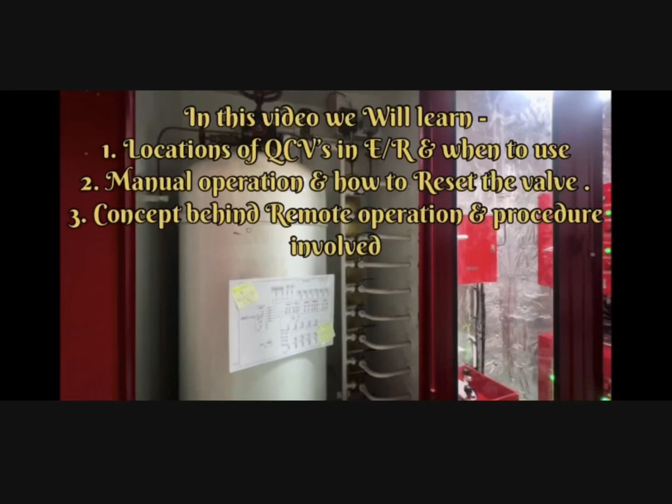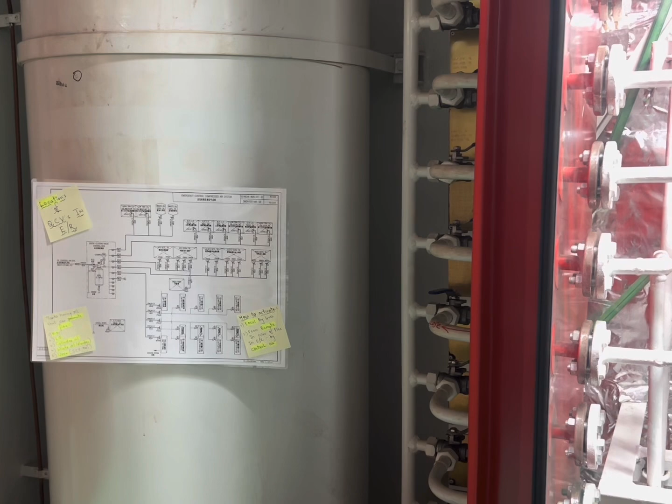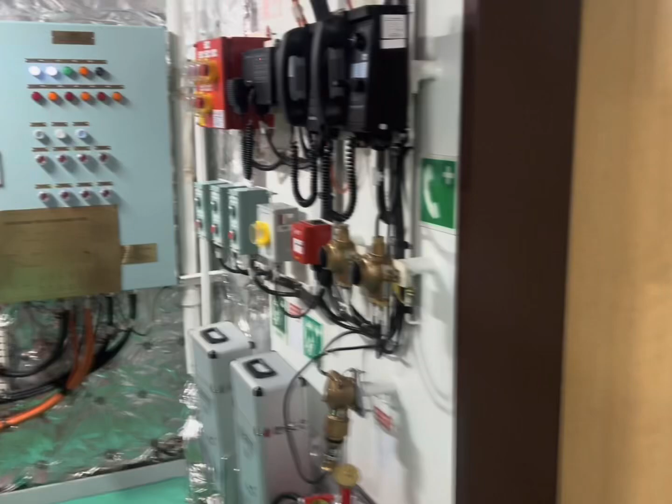So guys, in this video we will talk about what all are the locations of quick closing valve in the engine room. So presently I am in the fire control room of my ship. Along with this we have the manual release of CO2 system for the engine room and for the cargo hold. Also in the fire control room we have the local water mist panel. So in case of fire we can operate the water mist from here.

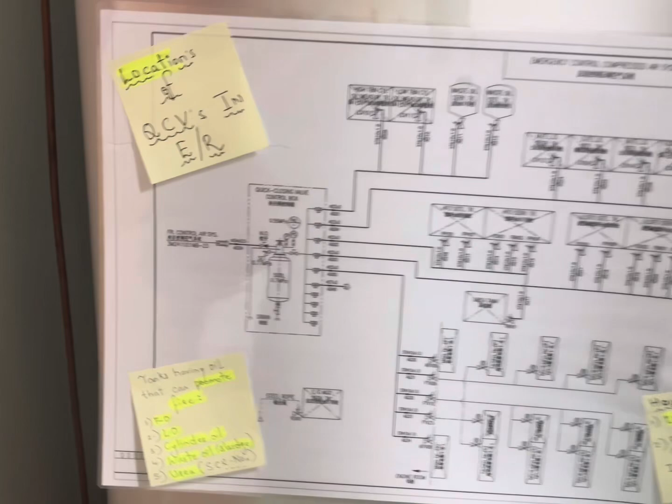Also we have the fire damper panel, and in the end we have the air bottle for operating the quick closing valve. So coming to the main topic, what all tanks are required to be fitted with the quick closing valve. The tanks having oil that can promote the fire are required to be fitted with quick closing valve.

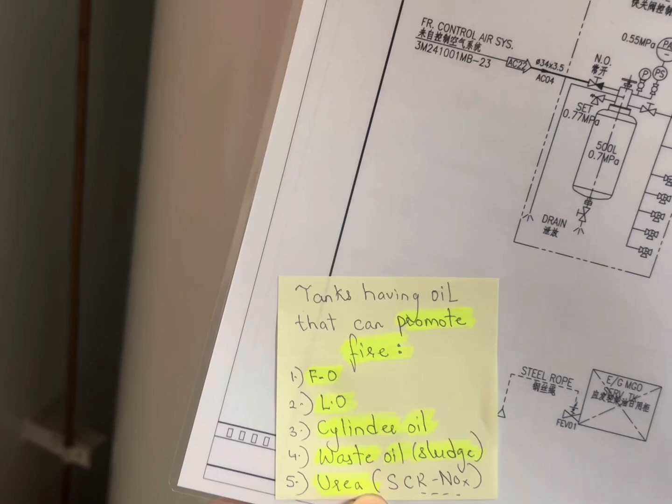That can be fuel oil tanks, lube oil tanks, cylinder oil tank, waste oil tank, and in our case we have the SCR system on board ship for controlling the NOx. So the urea collecting tank is also fitted with the quick closing valve. Here are a few of the examples.

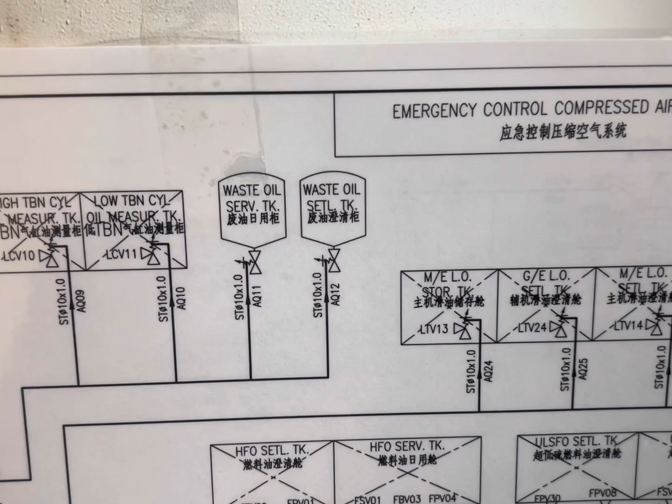The cylinder oil tank, high TBN, low TBN, we have waste oil tanks, service tank, settling tank, we have the lube oil storage tank for main engine, auxiliary engine and various others. Then we have the fuel oil tanks in the engine room, that is the heavy fuel oil settling tank, heavy fuel oil service tank, low sulfur service and settling tank, and MGO tank. And then finally we have the fuel oil storage tank, port side and starboard side.

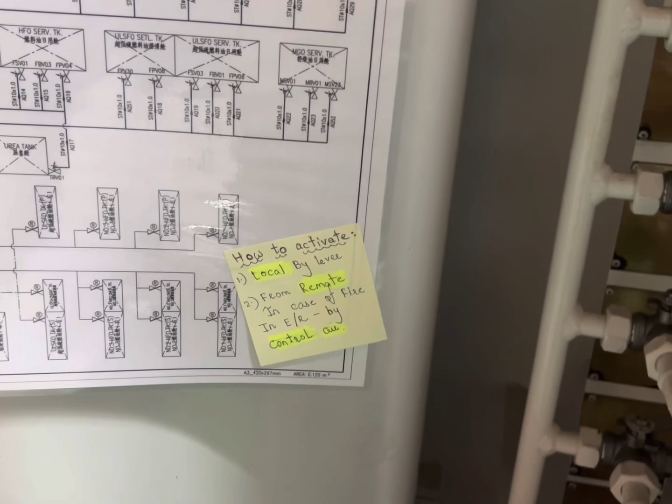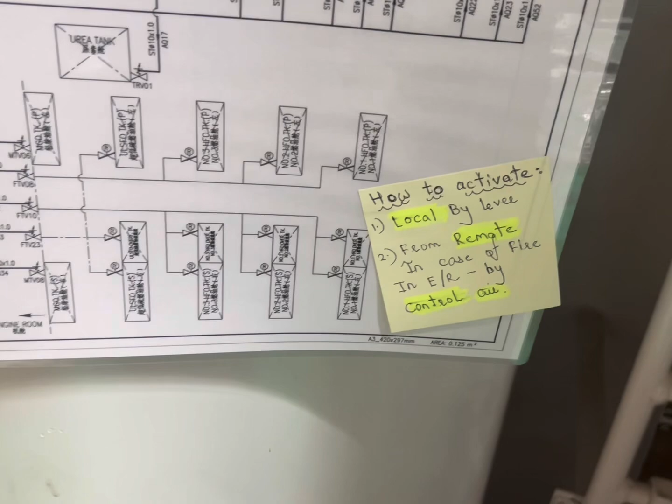Now the question is how to activate this quick closing valve. It can be activated by two methods. One is manually from the local position, and secondly remotely from the fire control station by means of control air. So here you can see this is the control air bottle. The pressure is around 7 bar.

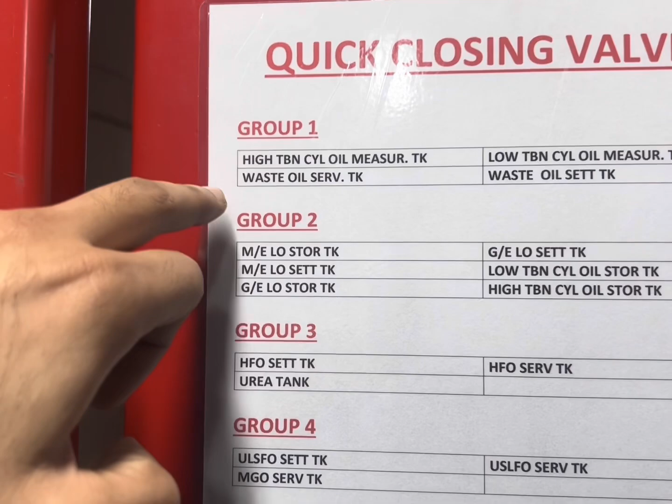From the main engine air bottle, after being reduced, the air is coming and it is being filled here, and then from here it is going to the different sections, or we can say different groups. So here you can see the different groups. Group 1 will be containing the quick closing valves in these 4 locations. Group 2 will be containing the valves in this location. Group 3 like this. Group 4, group 5.

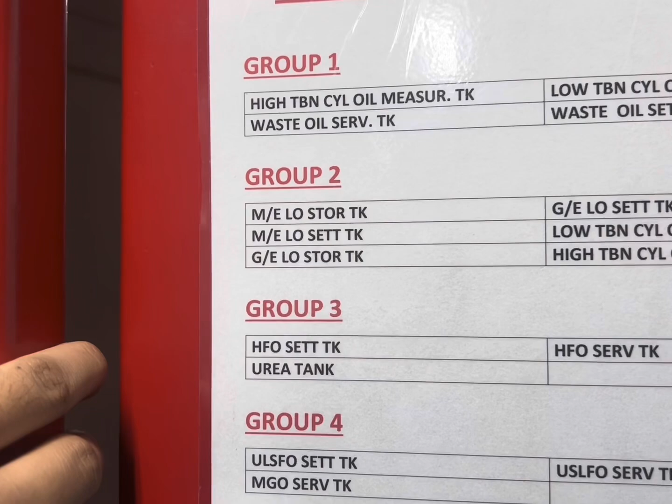So in case of fire in the engine room, let's say in number 3, if you want to close the quick closing valves which are located in group 3, you will bring the valve to the vertical position here. The air from the air bottle will pass, and all those valves located in group 3, heavy fuel oil settling tank, urea tank and HFO service tank, will be shut, and no more fuel from these tanks will be passing to the system.

So simply by operating this valve by 90 degrees, you can close the quick closing valves in that particular group, and that's it. So now I will go in the engine room and I will show a few examples of the manual activation of the quick closing valve.

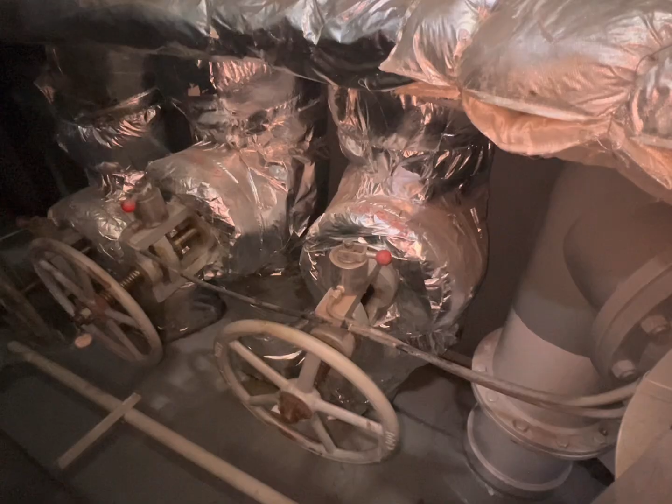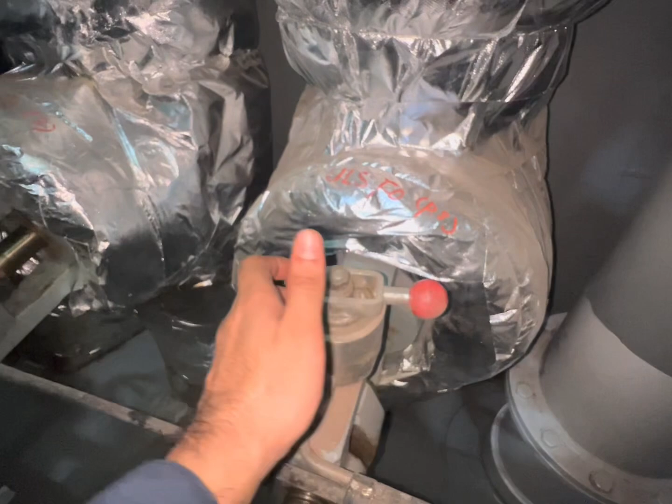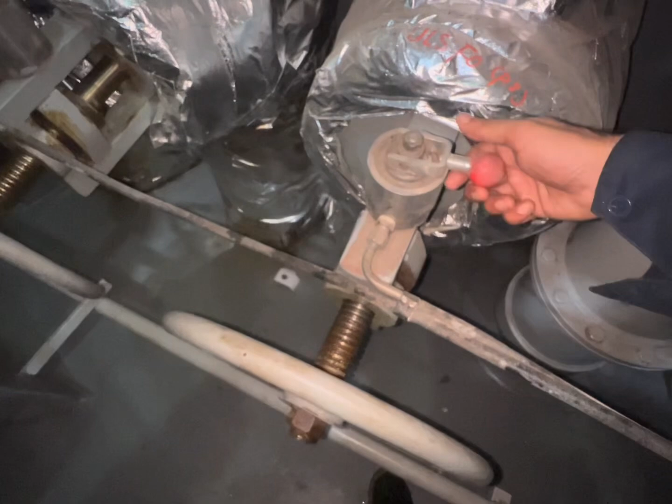So guys, this is the quick closing valve for one of the fuel oil storage tanks, low sulfur storage tank. Now you can see the valve is in open position, and this is the lever which I was talking about. We have to operate this lever to close this valve in case of emergency. So now we will try this one. This is the lever, and pay attention here how the valve will be closed. Okay, the valve has been closed.

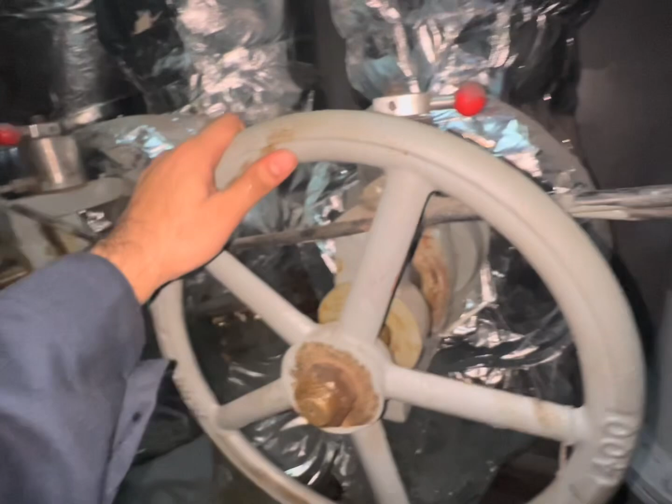Now guys, very important, how to put this valve back in the normal position. First of all, we have to close the valve. Close the valve. Now I am closing. Okay, now the valve is closed. So after closing it fully, now we have to open it. Now you can see the valve is being opened.

So this is the correct method for operating the quick closing valve. First, after activation, fully close the valve, and then open the valve if the valve was open. In our case, the valve was open, so we have opened it.

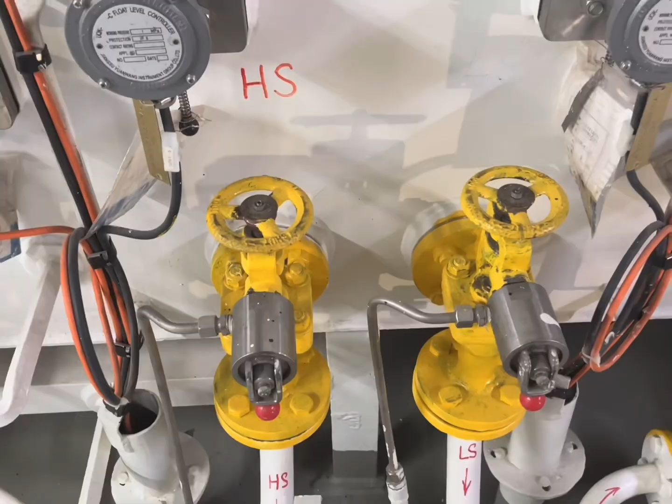I will take one more example. This is the high sulfur cylinder oil. The valve is now in open position. I will close the valve. Okay. Now you can see the valve is closed.

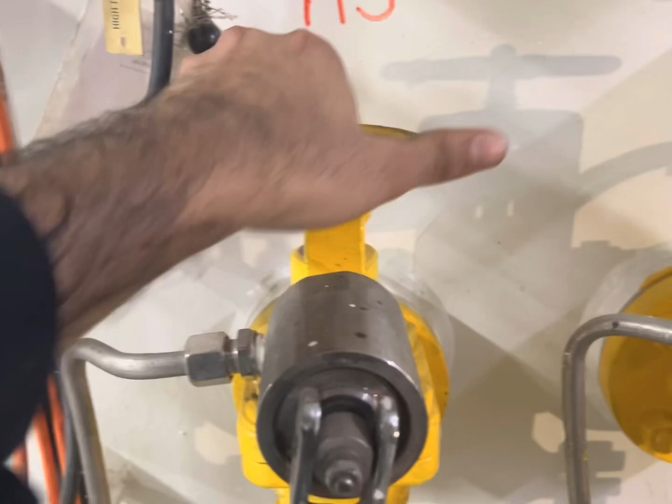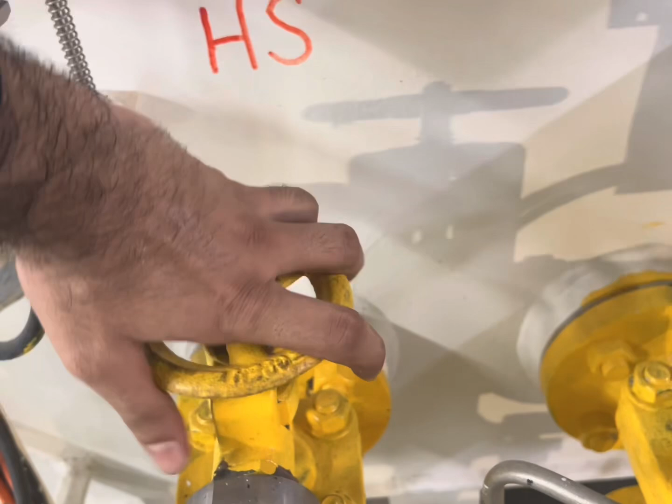So again the same principle. First we have to close the valve. Close the valve manually. Now the valve is closed, and since it was in open condition, we will open it again. Okay, the valve is now in open position.

So coming to the last and very important point. Whenever we are using the remote operation of the quick closing valve in case of an emergency, that is fire in the engine room, or for the quarterly testing of the quick closing valve, we are operating this valve by 90 degrees. Then the air from this bottle will escape to that designated area and will close all the quick closing valves in that particular area.

But very important, before resetting the quick closing valves in this area, we have to close this valve again so that no more air from this air bottle passes to the quick closing valves and keeps them closed. Otherwise, if we don't close the air and we try to reset the quick closing valve, we may even break the spindles of the quick closing valve, and then it will be a big problem for us.

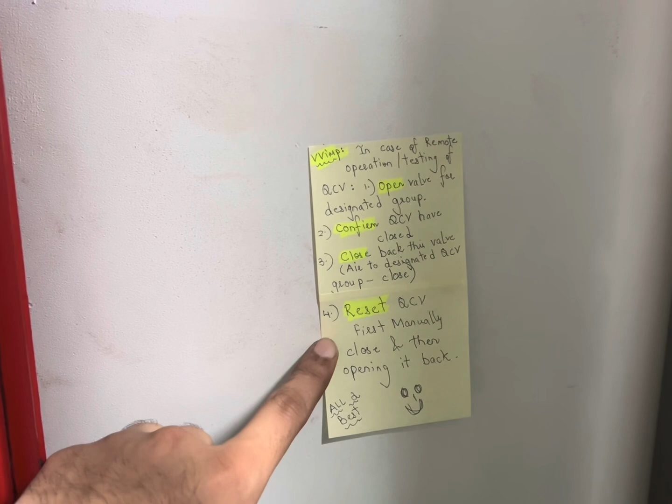So close this valve and then reset the quick closing valve. How to reset the quick closing valve, I have already told you. First we have to manually close it and then open it back if it was in open position. So guys, that's it from this video.